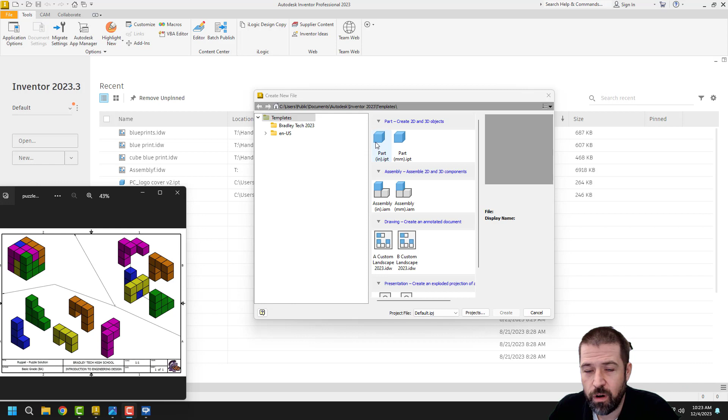In this video I'm going to go through the assembly of the basic puzzle solution. You've gone through how to make the parts, now we're going to go through how to assemble them.

We're going to select Assembly Inches, create, hit OK. Top left corner it says Place. Where it says Look In, pull it down and it'll say PLTWX, where you saved your parts. I've saved mine to the desktop, so I click on a part, hit Open, then click on the screen, and as soon as I click you can see my part.

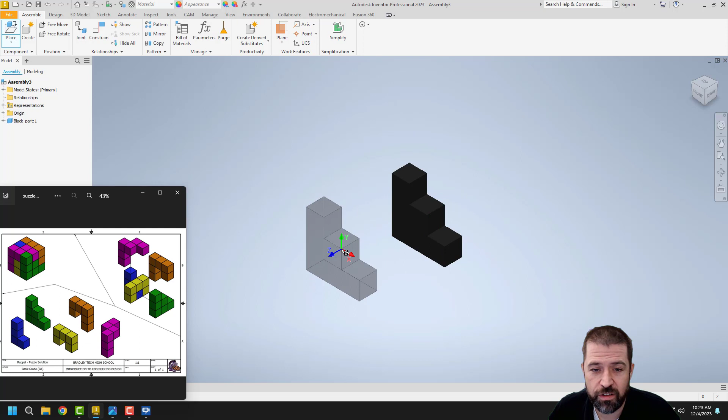If I needed more, I could click on the part on the screen, but I don't. So I'm going to go to Place, find another part, hit Open. Repeat: Place, find another part, hit Open, until all parts are placed.

The first thing I'm going to do is rotate some of my pieces. This is where I'm going to start from. You can see that my blue piece is turned.

If I click on Position, Grip Snap, I can grab an edge. If I grab an edge, it says Rotate About Line, and I can rotate it whatever degree I need. You want to rotate only at 90-degree increments: 90, 180, 270, and so on. In this case, I'm going to start with 180, and then rotate it around again 180. Now it looks like my part on my blueprint here. Right click, OK.

Here's my yellow piece. Again, Position, Grip Snap, grab an edge—only an edge, not a point. I'm going to rotate it 270. Now it looks like my yellow piece.

My black piece is my green on here. Position, Grip Snap, and rotate 270. That's my orange, and that is my pink.

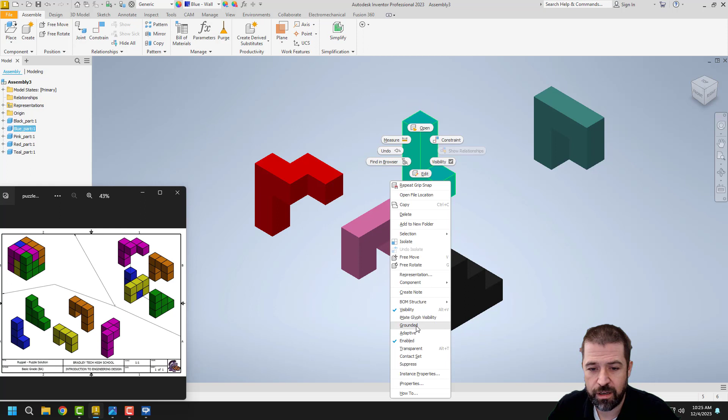But now to put it together. When we put something together, the first thing we're going to do is lock something in place. So I'm going to take this blue piece, right click on it, and go down to Grounded. You'll notice that puts a pin on my part. When I go to click on it, I cannot move it—it's locked in place.

Now to put it together, I'm going to go to Constraint. We have a lot of options, but I only need these two: Mate and Flush. Mate is going to touch two surfaces, so when I grab one surface and grab another, it'll touch them together. Flush will line up surfaces.

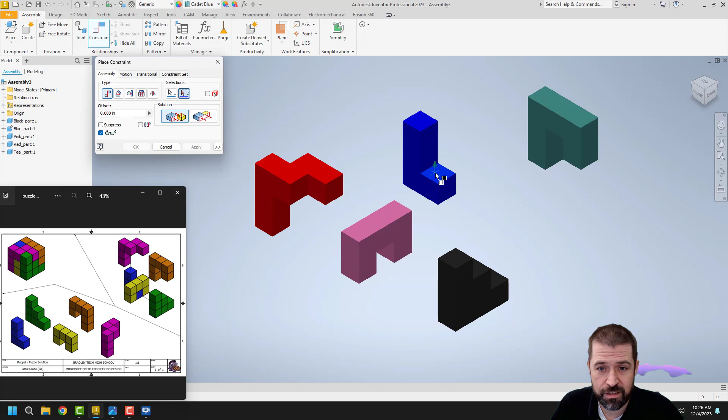The first thing I'm going to do is a Mate constraint. I need the top of this surface to touch this surface here. Grabbing a whole surface, not an edge—a whole surface. It should make a sound and it should move for you. Notice that they're touching now. Hit Apply. I can slide this over a little bit, do a constraint, grab this side with the inside here.

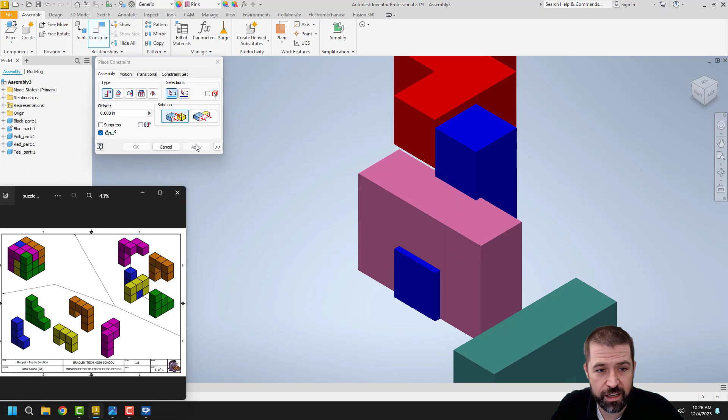Now you'll notice that they are touching. Hit Apply—it should move along that piece there. Constraint, and now here I'm going to use Flush. When I click on Flush, I grab this surface here and this surface here, and it'll flush them in line with each other. Hit Apply.

If I look at my blueprint here, this orange piece slides over the side. So again, I'm going to do a Mate constraint. I need the top of this to touch this opening. Hit Apply.

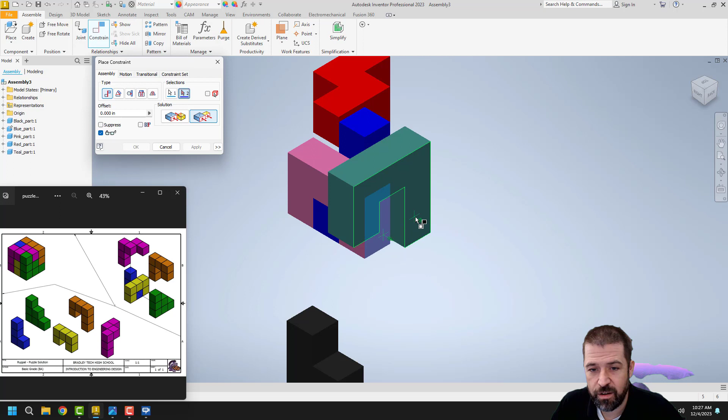I'm going to do a Flush constraint, this side with this side. Hit Apply. It looks like I can get away with doing another Flush constraint over here—you'll notice there's a gap in here. So Constraint, Flush, and I'm going to flush this side with this side, again trying to grab surfaces, not edges. Hit Apply.

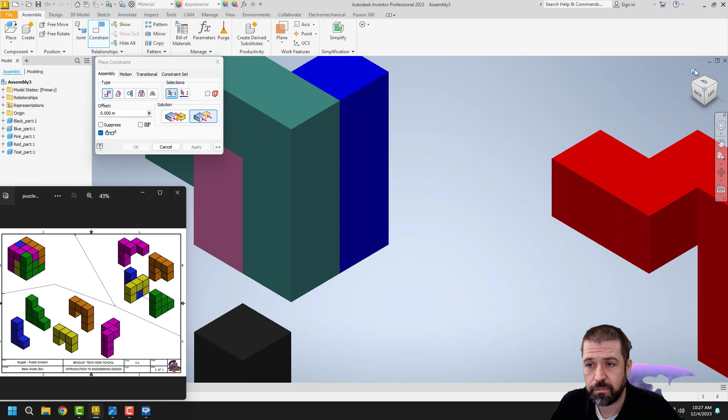Let's go back to my home. Alright, so now this red piece goes over this edge. Again, Mate constraint: the top of this pink, grabbing a whole surface, with the underside of my red piece. Hit Apply.

I can do a Flush constraint, line up this side with this side, hit Apply, and it looks like I still have a gap in here, so this side with this side, hit Apply. It's typically about 3 constraints per piece.

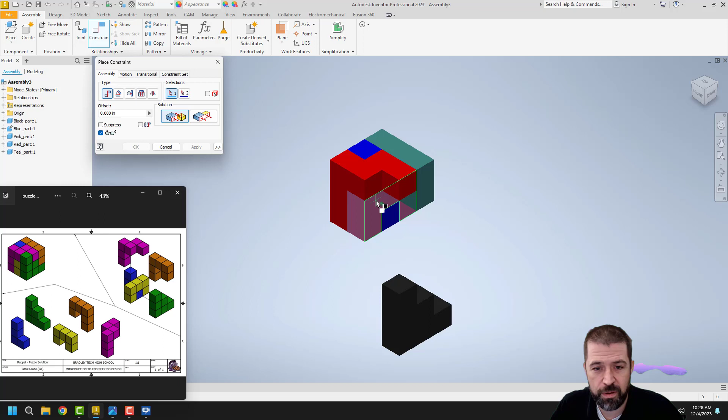Last one: Mate constraint. This pink piece again needs to touch the back side of my black piece. Hit Apply. Flush constraint—I can flush them on the top, so the top of this, the top of this. Hit Apply. And then again, I need to close this gap, so I'm going to do a flush constraint from here to here. Hit Apply.

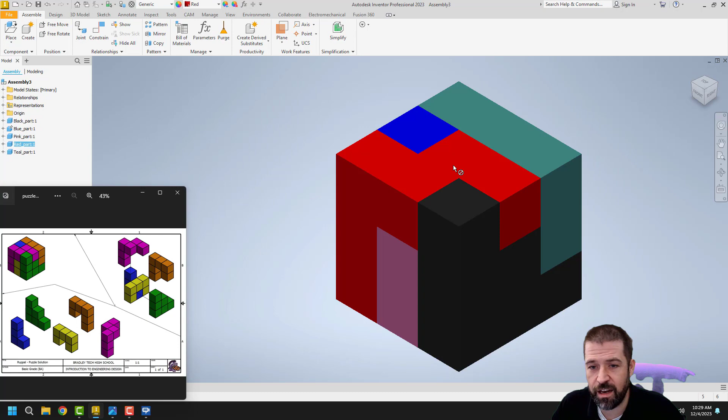The nice thing about the puzzle project is that you can use Flush constraint for a lot of pieces once you have a few of them locked in place. Once I'm done, if I click and drag on any of this, I should get that can't-move symbol, and your puzzle is assembled.